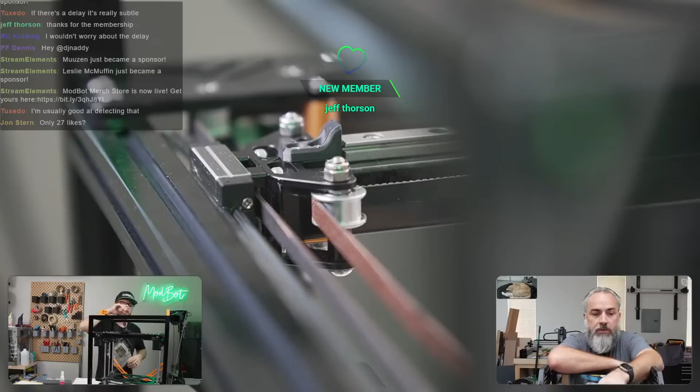When we took apart the X beam to grease the linear rails, there are these little CNC'd spacers that sit between the bearings of the linear rails and the CNC'd part that holds on to it. There's a spacer between the linear rail block and the CNC part that holds the carbon fiber beam. And what both Steve and I didn't realize, maybe because we were live or just an oversight, we both did the exact same thing.

I have a feeling it might have come from Mellow that way too. Yeah, it's possible that they ship this way, but these spacers are not square—they are rectangle, and we did not see that.

If anyone saw last week's stream, I told Steve one of my belts is sort of at an angle, and Steve said mine too. The reason is that it's not square, it's rectangle, and the way we had the spacer turned made it so the belt didn't have quite as much spacing in between here. These little blocks, since they're rectangular, you want the long ways to be horizontal and not vertical. If they're vertical, the extra length pushes into the belt.

So after last week's stream, we had to take apart the X, basically the CNC parts, and flip it, rotate it 90 degrees. That is really important to check because, again, it's not a mirrored piece—it's rectangular, so the orientation does matter.

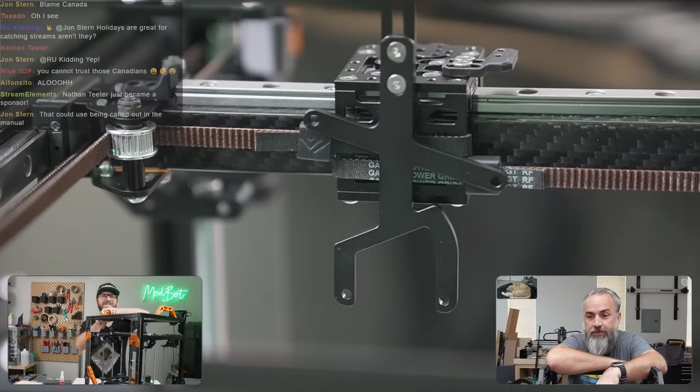So initially, going with what we saw on the 330, we had the belts going from outside to inside, and it was very subtle. But once it was brought to our attention, we saw that by doing that, the belt wasn't perfectly parallel to the back of the carbon rod. It was slightly kinked, which maybe would have been fine, but once Vez showed us the two methods of routing the belt, we ended up redoing it because we wanted to do it right.

So instead of that, the belts go basically underneath or behind the CNC'd part, the back plate, and then they tuck here. On this side I did the same thing where I ran it the whole way, but Steve let me know there's actually a pocket inside here where you don't have to run the belt the entire way. Luckily we had enough extra Gates belts from other projects to do this, because after last week's stream we did not have enough belts.

You didn't either, right Steve? You had to use other belts? I had to grab an extra belt, yep, because we hadn't trimmed it close enough—that's the length, yep.

So on last week's stream, I pinned a comment saying we did some things wrong in the belting, and I put a link to Vez's video on how to belt the 235, just to hopefully clear that up for anybody watching this later. So those are the two things that we've done from last week's stream.

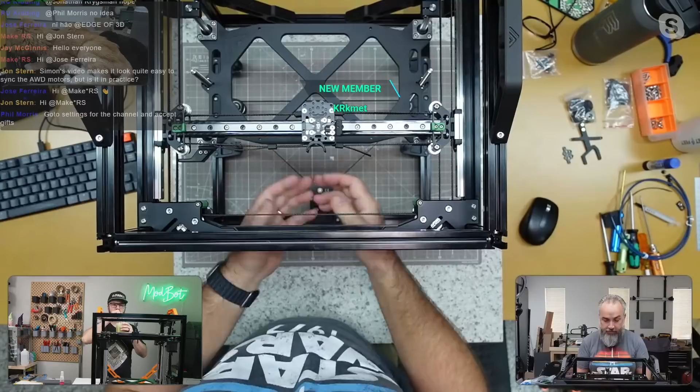Something that I just noticed, and with the way this is intended to be belted, maybe if I can take... yeah, there you go. So with the way this is intended to be belted, all the talk about having equal length belts gets thrown out the window, because the belt here on the left side of the tool head takes a shorter path than the one on the right.

So what I've done is I took a couple of the stoppers that come with the linear rails, and put them in a spot so that I can at least, when hand tensioning these, see if I've tweaked the gantry to any degree. And what I just noticed as you were talking is one of my pulleys up here on the front, the belt was riding on the edge of the pulley instead of in the center. So that's putting me basically a full tooth out of tension on one side. So while I'm thinking about it, I'm going to pull an extra tooth this way so that they're about the same.

We still want them all to be as close as possible when we go to do the final tensioning. And that way, when we use the front steppers to do that final tensioning, they'll end up at about the same spot. Your belt lengths will be exactly the same. That'll have a slight impact on input shaper results, and that kind of thing.

So if you do it sort of incorrect like me, and route the belt entirely across the cage on both sides, you can do the same. I'm looking right now and I cut them identical, and if I look at the amount of teeth sticking out from both sides, I count 1, 2, 3, 4, 5, 6.5, and 1, 2, 3, 4, 1, 2, 3. Yeah, I've got exact.

So let me go here to show the side. When we found out about this, and I realized that the belts that came with the kit I'd cut too short, I ran around the house like a crazy person trying to see if I had belts. I had non-Gates belts, I had clone Gates belts, and I had snippets of true Gates belts scattered everywhere. So I was able to find, this is the longest Gates belt I had in the house. I had two of them cut exactly this length - must have been from a future project.

So it ended up, I guess with this one, if I'd gone through the slot, I had a little bit more slack. But for this one it was like the printer god smiling down on me, because normally it's not that way. I was worried about how am I going to get Gates belts here, maybe Amazon or something like that. So Steve had offered, I think on Sunday, like if you need Gates belts, let me know, I can ship you some quick.

So yeah, but today we are going to be continuing, and I think the next thing is going to be just doing a little bit more stuff on the cage, if I'm not mistaken. Yeah, let me see here.

Real quick, I think a good number, if you just wanted a measurement of how much belt you needed for this - if you had 1.5 meters of belt, I measured you can get away with as low as like 1430. But if you said 1500 is the length of belt, you would have enough to loop things around and be just fine. I think in the video Vez had, he said like 150 centimeters, which would be exactly that, or I think he said 13 for the shorter one, maybe the one you can go through that loophole or whatever. So yeah, you can get a little shorter there.

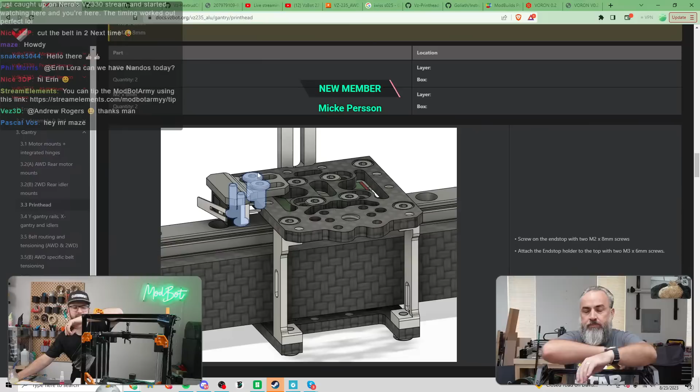So we did this last week. We did the cage last week, we did the end stop. I did verify too, Steve, because we didn't mount the end stop, we just mounted the CNC bracket, and I did verify it. It looks like there's plenty of space with the extruder mounted on top to still be able to remove that later, because we'll need to be able to access the end stop. I know you had said that because the adjustment screws are there it made sense, but I confirmed it when I was playing around with things.

Awesome, so running man is in place. Belts are installed, but we're not tensioning them yet. Okay, so this is where we are.

This we saw is slightly different than the blower fan shroud that comes in the kit. There must have been a revision. It looks like this is a unibody with the standoffs, which might not be the case, but definitely the overall shape of this piece is different.

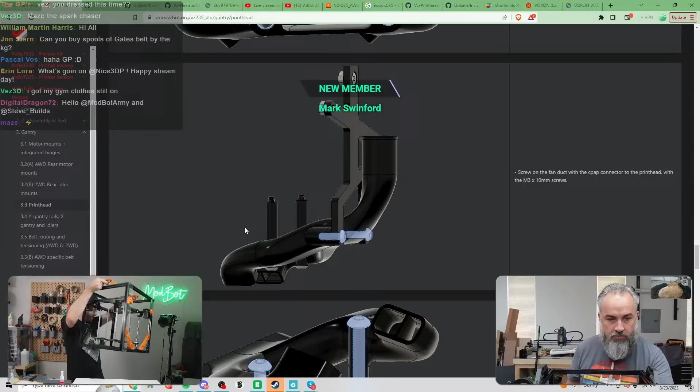So let me move this printer out of the way. Let me grab the actual shroud. I gotta find my printed parts too. Here they are, all right.

Okay, so this is the shroud that comes in this kit. Or, I'm sorry, this doesn't come in the kit, this came in our ASA VZ program, which I'm assuming is the latest revision.

Hey, what's up Luke? How's the high temp VZBot going, Maze?

Yeah, I'm looking for them. I'm certain I've seen them, I just have to figure out which bag they were in.

So this is the part that we're going to be using, and then we've seen two things. In the instructions here, they show - was it here or was it in the - yes, so here it shows to use heat inserts, and the kit doesn't come with any heat inserts. But we did see in another version, I think it was in the GitHub, that you can also use just M3 nuts on the other side, possibly.

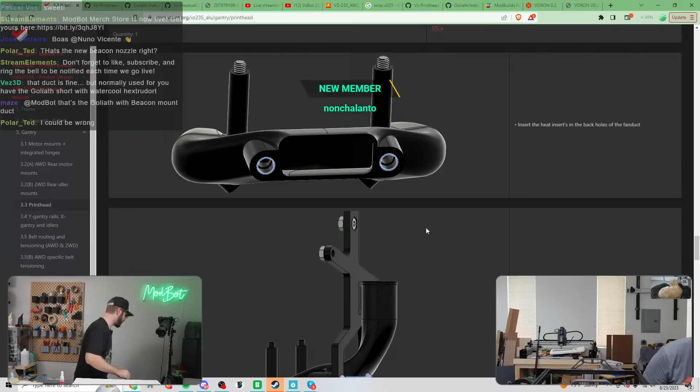I'm still going to use this because, again, if I'm going to be installing auto bed leveling at some point on this, I'm probably going to have to reprint a different duct anyway, I would imagine. But that is good to know. I mean, he says it's fine, but that is good to know, and that's probably why it looks different than the instructions. So I'm going to grab just a couple of heat inserts.

Let's see, it will still work fine. Okay, and I can't actually find my little spacers, so I'm going to install without them and catch up later. I think it's pretty easy. I'm pretty sure I saw them at some point, but I don't know where they are.

Oh, I've got another box here. So I'm going to use the Pinecil that chat recommended that I buy. Well, it was between this and I think it was a TS100 tiny little soldering iron. And this morning when I pulled out the soldering iron I've used for heat inserts for the last 5 or 6 years...

Oh, the spacers will be different, he's saying. The spacers will be different? Well, yeah, hopefully our providers at least printed the correct spacers. Oh yeah, I would imagine. Yeah, you're right, you're right, I would imagine that's the case. We'll try them, and I guess worst comes to worst.

What are you playing on Steam? I haven't played Steam in... wait, did it show Steam? Oh, it's open down below. I still have it on here, but I actually haven't, I was just telling Steve, I haven't played, other than on Steam Deck, like a video game on PC in a long time.

So because the soldering iron that I have finally died, I tested this out and it worked really well for some testing heat inserts I did earlier. So right now I'm just using, it's basically a MacBook charger.

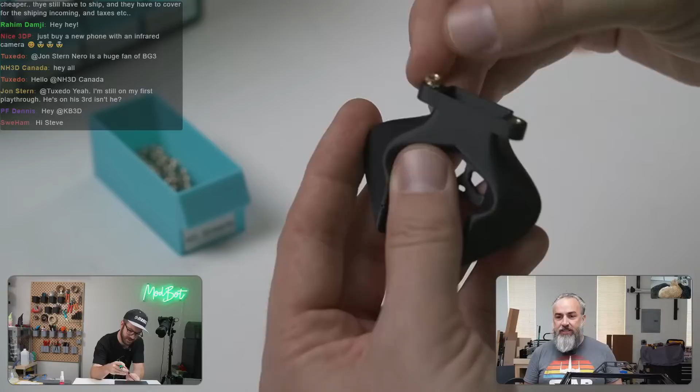So it's surprisingly inexpensive for that heat set thing. I think I looked at it, it's $25. Yeah, that's not bad.

This duct can be used for both air-cooled and short water-cooled Goliath, while the long one only fits the air-cooled or water block version. Okay, that's good to know.

So one of them went in perfectly. The other one, I've got a little bit of plastic. So I'm gonna take my little flush cutters and take this off here.

Steve builds this. Oh, that was PB. He read that.

So I'm just going to... I believe we will have them in stock soon.

I have mine, but it's amazing. That's Shammy talking about the heat set tool. Oh, CNC Kitchens? Yeah, oh sick. He's gonna stock them in the States? Looks like it. Oh, if that's the case, yeah, I'll order from you Shammy when you get them in. I'm not in a rush. I mean, the default tip's working, but I like to support Stefan, and it'd be cool to have. Yeah.

Cool, okay, heat inserts in. My iron's still heating up.

No, what kind of iron is it? It's the cheapest thing I could find on Amazon that had an adjustable temperature. One of my original ones was like either a Radio Shack or Home Depot one you just plugged into the wall. I think it was one temperature, and it had like a little orange LED in the handle or something like that, so you knew it was on.

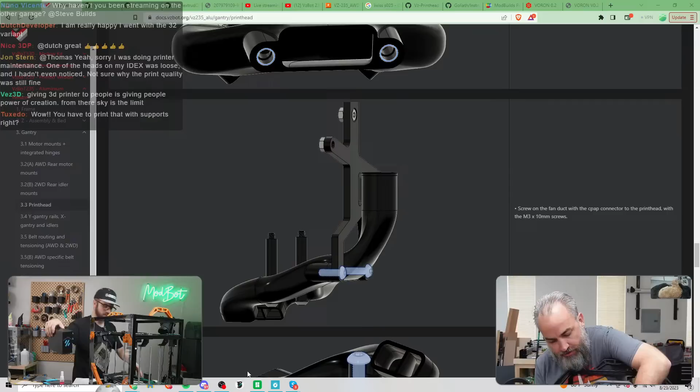Why haven't you been streaming in the other garage? Because I set up in here for the Voron Trident build streams, and I haven't moved back because it's a mess, and I like the extra space I have in here. But separating my normal work area and 3D printing tools into two different locations is the biggest problem. Plus, I can't just freely do something dirty in this garage now—I can't use the table saw without worrying about sawdust getting everywhere. Does that make sense? I think so.

All right, one second, Steve. Okay, so going from behind. Yeah. Oh, that's interesting. I screwed it in and completely missed the little duct. Oh shit.

This angle I'm at for the camera is incredibly awkward. Oh shoot. Just heard a crack. I need my driver—I'm trying to one-hand grab the driver while holding the screw in place. There we go.

Okay, so the holes on the CPAP printed piece don't thread into it well. Yeah, okay, just print quality issues? Oh, you think that's what it is? Wait, I think so, hold on.

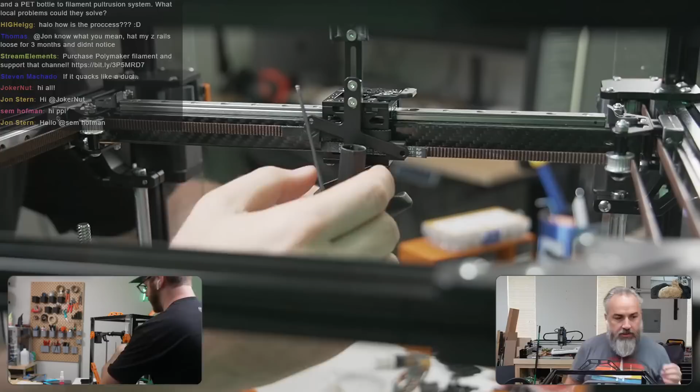And then as far as this must go downwards. Yep, duct needs to be going downwards, right? I can't see the picture from here. Yes, okay, the air ducts point at the nozzle. Yeah, downward, that makes sense. It's the only way that would make sense. Yeah.

That's pretty funny, I thought I triple checked that I had grabbed the right piece, but I grabbed the smaller one. Yeah, so I've got this—I'm not going to put the spacers in because I can't find them. Okay, but normally those would be some M3 by question mark screws. I'd say those are going to be M3 by 25s. Is the question mark because it's related to where you have the fan set at? Because you'd need longer screws if you had longer spacers, so they can't have an exact size.

Right? Yeah, because if that whole thing slides up and M3 by 25 isn't necessarily correct, that whole thing slides. So that spacer is going to need to be variable, right?

I'm gonna leave my spacers off for right now. I can't think of, or should I just? It's going to be hard to get in with the Goliath on. You're going to have to pull the Goliath off later. Okay, so I'm going to have to, and that's fine.

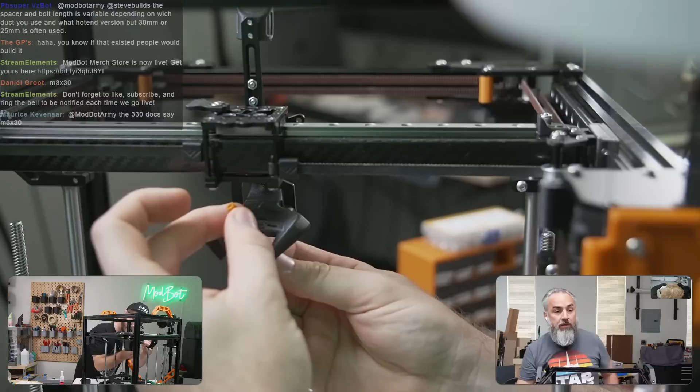Oh shit! I need, I gotta clear out these holes with a reamer. Do you have the reamer? Oh, you betcha, Steve. Awesome.

Pretty much every time you've been like 'hey, buy this thing,' I end up buying it, and it's pretty much always saved me. So let me see, this is 3. Yeah, the holes on the bottom here just aren't super clean. See if I can hold this in place.

You gonna come over here, Charlie? Hey Sam, college starting next week, for mechatronics engineering. Awesome. Is it first year? That's exciting.

I should have done this before I put this on. That was not a... are your holes, can you fit an M3 through yours, Steve? Let's find out. Okay, yeah, mine's requiring... I think it's because of the direction it's printed at. That's sort of where a lot of the sag ends up.

I have not used a Goliath before this build. Yeah, mine will need some reaming as well. Okay. Okie dokie, all right, bolt should hopefully go through now, and it does.

Standoff goes right here. What is there, a 25's too long, is there a ringing in the background? I don't hear anything. Really?

25 is cutting it close. I think for these guys, 20 mil is probably better. I can show, let me see if I focus it. So that's it sticking out. It's gonna be very close going through that if it's gonna be going into that carbon fiber rod.

You see that, Steve? Yeah, it's close. I think I'd rather go a little bit lighter. Hey, Adam, okay, yeah, let's see if I've got a 20. Does the kit have 20s? No, do I have 20s in this old Voron screw organizer?

M3 25s, M3. I don't have M3 20s. Oh man, I think I'm gonna hold out, Steve. Okay, yeah, we're both holding out on those then. I've got to run around and see where I've got an M3. Actually, damn it, let me check one last place.

I think I've got another set of leftover screws from when I did that Voron 0.2 build. You still hear ringing? I hear something.

I'm looking on my computer to see if I have any tabs open that are doing some noise. It's weird, yeah, I've got 16 and then it jumps to 25, so I'm either cutting or running around looking for something later on. Spacers should be around 23 millimeters.

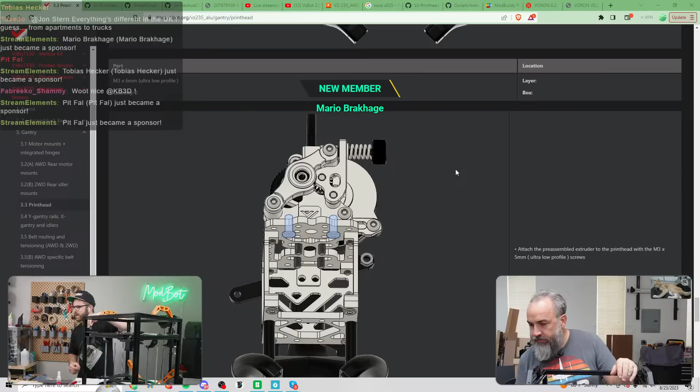Okay, so next thing I think we're mounting the extruder, Steve, is what it looks like. Awesome. And that looks like it's with 2 ultra low profile wafer M3x5s, which we do have.

So this is the, what do we call this? The keyboard extrude something. What do you mean, Hextrudort? Oh yeah, VZ Hextrudort. I have a hard time saying it, but every time Vez says it, or Simon says it, he says it like perfectly. I mean, I guess he probably named it, so, but yeah, it's a

gorgeous looking extruder. We showed it off, I think, when we did the first unboxing, but for anyone that hasn't seen it, it's just absolutely gorgeous. It's got the VZ logo, it's all black CNC'd, nicely anodized, and it's got the helix. So they're called helicoil, or what's? I don't even know. Helical, okay, helical gears on here. So yeah, these are really, really pretty.

Okay sweet, KB is going there, so I'll see you in October then. That's exciting.

Yeah, it's weird, in my AirPod I'm hearing an extra noise. But if it's not coming through, then I can ignore it. Yeah, I don't hear anything. I know yesterday you said at one point too there was something weird happening. Remember when we were talking, like you heard a strange sound? So I don't know, but your audio sounds really, really good to me.

Awesome, yeah. Okay, so for this, it looks like it just basically sits right on top and aligns with 3, 4. So there's no extra things here. No extra, okay, so we need.

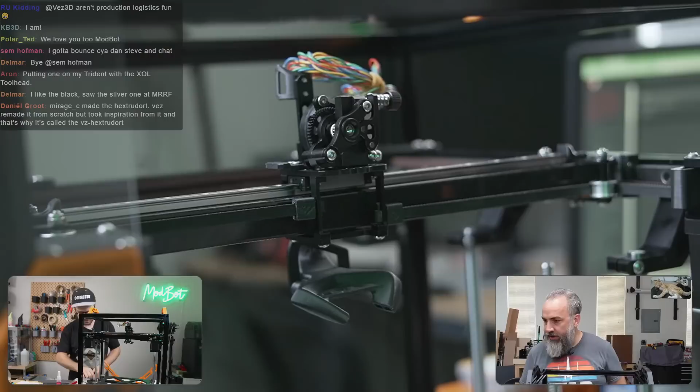Doesn't look like it, it says M3x5s. More M3x5s. Are these actually M3x5s, or will M3x6s work? Oh, it says M3x6 up top, so I hope that's... I would. Further down in the thing, it says from the bottom going up, M3x5s. I'm gonna install 6s and pray. So yeah.

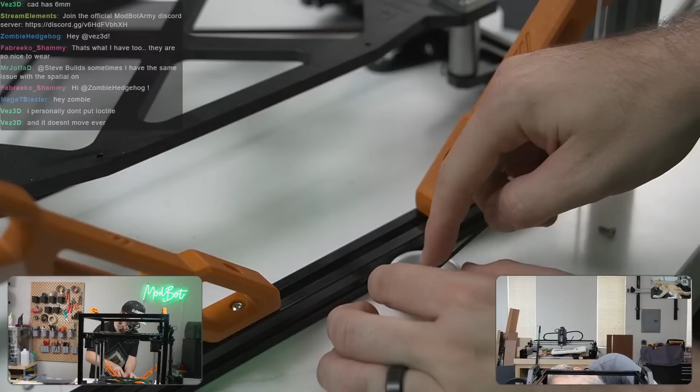All right, let's see if I can... I personally don't put Loctite, and it doesn't move ever. Well, that's...

That's wild to me. Even, Vez, on your primary one that you're pushing at those crazy speeds, you don't use Loctite at all? I feel like that's nuts. Because he also just says that he removes stuff so often. Yeah, that's fair, that's fair. If you're mad scientisting your printer nonstop, I could see how you might not want to lock things down any more than you have to, if that makes sense.

Yeah, these do kind of look like they lock or settle into a spot on this spacer. Okay, I'm trying to, let me see here.

I got one in, but for some reason the second one, it would help if I was going in the right hole. Got to go in the right hole, it's critical. There's a couple small ones on the other side that I was going for. No Loctite, yeah, I'm excited to try.

What do you put in the Goliath on, Zombie? On your Trident, or on something else? Is there not a stealth burner? Is there a mod, Steve, for a Goliath? I know there's nothing official. Nothing official, I'm sure someone's made a mod. Someone's made a mod for everything. That's true.

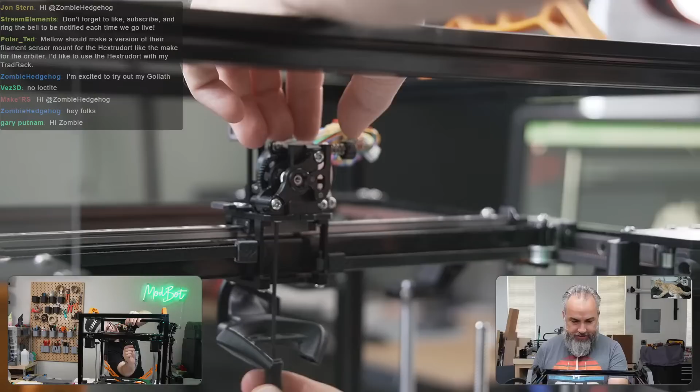I mean, I think there's an ultra super mega volcano mod that stretches the stealth burner ducts down 8 inches. This says, okay, I've measured the screw needed on the duct spacer. It's 28 millimeters with a 23.5 millimeter spacer. Okay.

Is 28 millimeters a standard size? It's not, huh? It'd be easier to do, Vez. Oh well, I guess it has to be, right? It has to be a certain height, there's no choice, at least. Right, because there is space, there is space if you wanted to put a spacer on the other side of that duct to use a 30 millimeter screw. You could put 2 millimeters of spacer on the other side and be fine, I think. Okay, yeah, I guess worst comes to worst, for a 30, I'll go out in the garage and grind it down if I have to. For a 28, but that's good to know.

Okay, so I think that the next thing is basically Goliath time. So for the Goliath stuff, I'm going to at least start off by moving the printer out of the way so I've got a bit of a cleaner work area.

Hey Vez, when you say we can print the other one, you're talking about the whole ducts? The full duct? The other duct? This duct was designed for the short version of Goliath. And there's a short version versus this long version? Oh, that makes sense. Yeah, for the water-cooled one would be shorter, Steve, because it doesn't have that same heatsink probably, it probably uses a different block setup. At least that's the only thing I could think of. Otherwise, I don't know how you can go shorter because you still need that heatsink, the one you see in the duct.

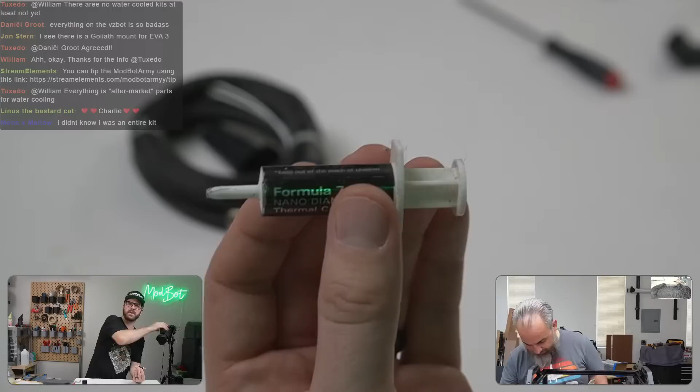So yeah, last night I was running around trying to figure out if I had any thermal paste, and I found some of this stuff. So this is what we're gonna use in place of the boron nitride, or at least what I'm gonna use. I don't know where I got this from, probably many years ago, but it's probably better than the boron nitride. So we're going to be using this Formula 7 stuff.

What are you using, Steve? I'm using Arctic MX2 because that's what I found too, in my stash of things. Just randomness.

Okay, let me go overhead and see if I can zoom in a bit. That's as far as you can zoom in. That's fine. So we'll start off by removing the 3 small bolts holding this in place.

Definitely not wanting to lose these little screws.

And I know I have some more current thermal compound in my collection of things, I just couldn't find it last night. And this stuff I'm using right now is actually a little more dried out than I would like. Maybe I can get a little further into it. Let me try a little. Okay, never mind, I got it. It's just the plug on the end was really dry - behind that, it's nice and gooey.

So I thought you couldn't use PC thermal paste for heat breaks. Why not? I know that Drop Effect also recommends using PC thermal paste. They did some testing, I can't find it anymore, but I looked for it - they tested 3 or 4 different thermal pastes and found very little difference in performance quality.

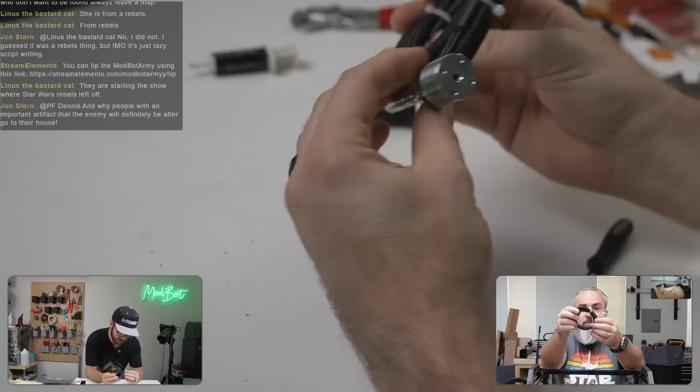I think it's reasonable to run some additional wires in there. It just means cutting off this heat shrink and replacing it, I think.

I'm curious, because it feels like the heating element wires have a coating on them, or maybe they don't. How hot, and where the heating element of these wires stops, is another question I have. Yeah, I guess that's the thing, you can't put wires near it or melt them.

Are you saying that if we put wires through there, there's a chance of overheating? It says you can't put wires near it or melt them, but you can remove that sleeve if you want. That's what I'm trying to interpret, maybe there's a typo. I have personally removed the sleeve, is what Vez is saying.

Well, let's explore that when we're prepping for wiring. Sounds great, explore our options. We have Vez here, can you call me on Discord somehow? We're on Skype, so I don't know how we'd do a Discord thing right now. Yeah, I have no idea how we'd integrate someone.

Vez, we're not going to be doing the wiring today anyway. I just wanted to run it by and see, since you were here, if you had a solution for it. So if there's any images that you or PF or anybody wants to post in our Discord that we can look at for inspiration, that would be cool. It's not a huge concern right now, I just wanted to ask.

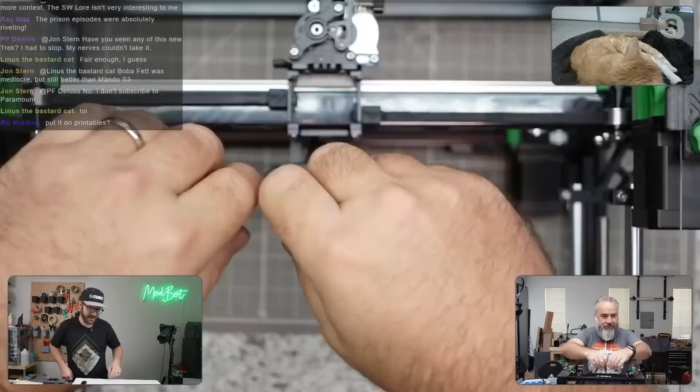When Steve showed that jig, I was like, that is way better than what I use, which is just holding the PTFE out in front of me and doing my best to freehand slice downwards. Anyone who knows me and my squirreliness can imagine how jittery my hands are trying to cut perfectly straight. So yeah, I like this solution a lot more than mine, Steve.

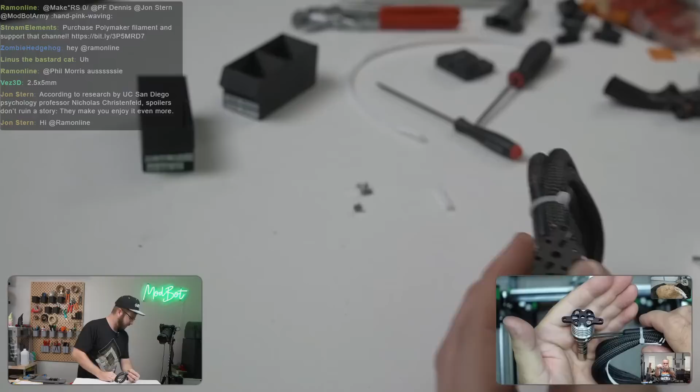There we are. Oh, you've got yours going perfectly out to the left. Yeah, that's different than mine. I've got it going slightly inwards. All right, I guess I'll just...

For now it doesn't matter, because I can always take off the 3 prongs on the bottom and rotate it if need be. Yeah, that's what I'll end up doing if needed. You might have to still rotate it up here, but we can always go through and redo this when we need.

This is not the right one. What size driver is needed for this? 1.5? Yes, oh wow, okay. It's in my special cubby of hardly-used tools.

It's interesting, as we saw before, the screws that mount the extruder to the carriage go right here. These screws are more recessed than the front screws, to give that clearance. I am struggling. Steve got it wrong?

What'd I get wrong? Slightly to the front? Oh, slightly more wires coming? Yeah, I do need to go more to the front. I was lining this up before and thought this would be correct, but Vez is absolutely right, I've got it wrong.

So don't go by me. Okay, so what I have is probably fine then, going slightly out. I feel there's all sorts of confidence spewing from... all right, why am I not? I do have it wrong. So let me see, I was eyeballing things and thought I was close, but he's right. I'm off.

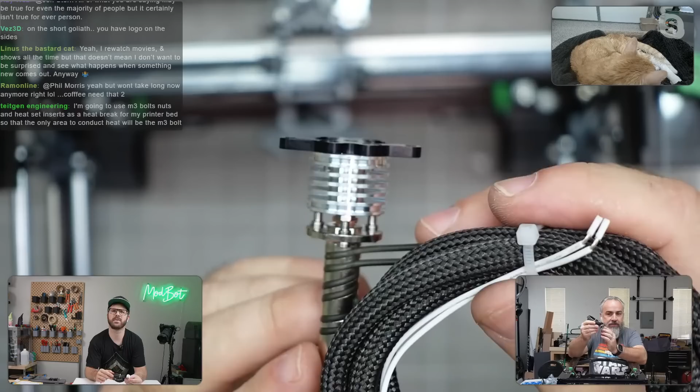Let me see yours. What do we got? What do you want to see? I just want to make sure I've got one pointed forward, but now the wires sort of go backwards instead. I'll show you, here. All right, let me go here. Okay, one pointing forward, yep. Heatsink on top, yep. Wires end up going this way. You see? Okay, so see how they go?

Right, then. And I'm waiting for Vez to say Steve is still wrong. Okay, I think I've got it.

I know exactly what you were referencing, Zombie. I know exactly what you were referencing. Is this my trident? Huh, is he referencing my trident?

He put the front Z stepper mounts with the logos going to the side, like mine, exactly what you're going to change, but that's okay. You said you were going to make a change to the trident that made it actually matter, so that forced you to have it correct. That's funny that Zombie did it too, though.

So Vez is saying check the CAD if we're in doubt. No, the CAD has it going up the left side. It has the wiring for the Goliath going up the left side, when everything I've heard is going up the right side. So that doesn't work. Which is correct?

I've got mine matching yours, Steve, with one pointing forward and the wires going out the right side. To be honest, Vez, I don't trust the CAD. There's so many little details like this that if we should be looking at the CAD for this, then we will, but...

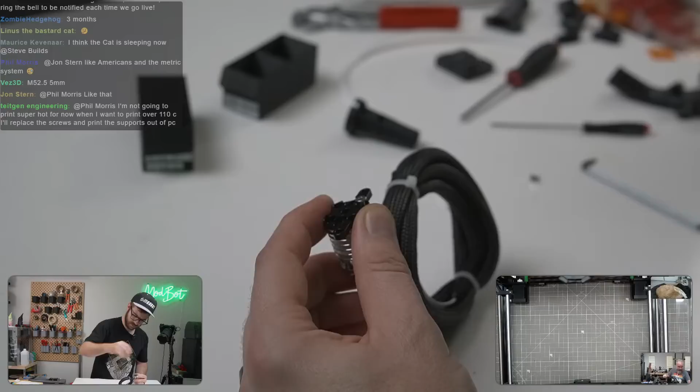So something to note, something to note for Mellow. So you're telling me I'm getting my grind on again? I think we might be, because we can't tighten them - we can't unless you just tighten them into the aluminum, but I don't think that's a great idea. The front ones tighten just fine.

The rear ones are bottoming out before they're tight. There's not as easy a way to hold onto these though, because we don't have 2.5 millimeter nuts. Yeah, I think I'm just going to throw them into my vice grips and take out a file. You don't have 5mm other than... I'm saying for sure, absolute for sure, we did not get 2.5 by 5.

Yeah, absolutely for sure. It came - they're not even labeled on the little baggies they came with. These are labeled and they're measuring M2.5 by 6. So if the other folks got earlier kits or something, they changed something.

I don't know if I want to. I don't have a good way - I mean, I could use my grinder, but I want a good way to recommend to you how to do this too without a grinder. This is what I'm planning on doing, Steve: gripping the top of the heads face up as much as I can with my left hand and just filing a millimeter off.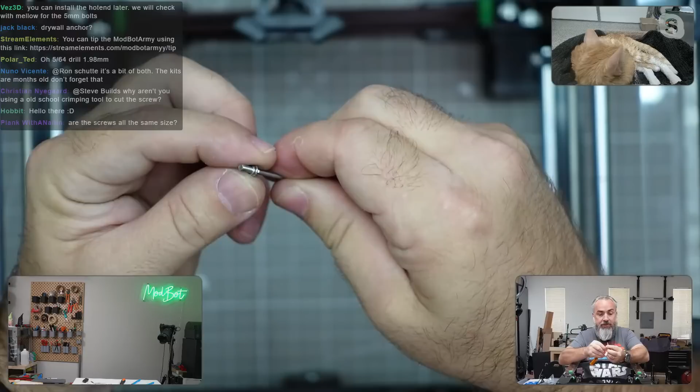Why aren't you using an old school crimping tool to cut the screw? Because I don't have anything for 2.5 millimeters for one. For those to work well, you need to be able to back those out through the threads to clean the threads up. And I don't have any M4 or M2.5 nuts to be able to thread onto here to clean up the threads either. So as it is, we're going to have fun with these threads.

These are the only 2.5 millimeter screws in the kit, and they are just a slight bit too long. I'm convinced it's all a bad idea. I was out there, I found it. I only found the cutting disc, but like you're saying right now, even if I take a sander to it, I'm concerned that I'm going to destroy the threads on these little screws.

So I'm thinking maybe we move on to panels. Yeah, well we can probably mock this up still, put it on with just the 2 screws. Okay. But the low profile head here is key too. So just finding these somewhere - we'll be able to find them on McMaster probably, but not anywhere that's going to be reasonable shipping and quick. Yeah.

Well, just having a Dremel or something like that is fine. But no matter what we do, we're going to goober up those threads on the end and have no way to really clean them up. 2.5 millimeter threads, or the threads on a 2.5 millimeter screw, are really fine, and it's going to be really tough to make sure we're not gouging or destroying the threads on the heatsink.

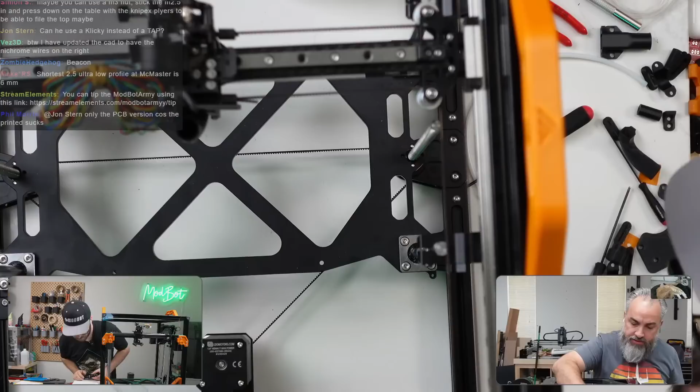Okay, let's see if I can get this in. I've only used 2.5s for hot ends and only the fasteners that came with them. I think I bought 2.5 by 12s one time because they were needed in an earlier version, I think Afterburner, that was different, or maybe it was the first V0 or something, it was different from what came with it. Thanks, Rod, I knew I just couldn't remember if it was Ron or Rod.

Misumi USA has them, so I've got a link in my Discord chat, it looks like, from PF Dennis. Oh really? Yeah, Vez is going with my original suggestion, to drill the heatsink. Really?

Honestly, why is it bad? If you used a pin vise where you could do it by hand so you're not goobering up the threads, I bet you could do it well enough.

I can ship you guys some. Okay, I'm gonna just slide my Goliath in place, man. I even have an M2 and M2.5 tap and die set. That's nice, I should get one.

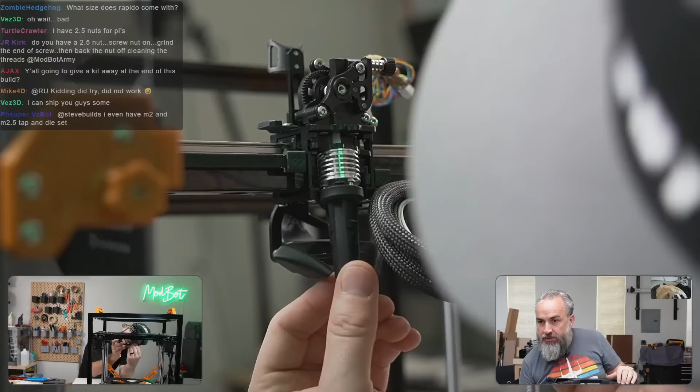Okay, are we on the same spot now? I think so. What screws are used for that? Yeah, I agree Vez, worried about screwing up the threads. I'd be confident doing it myself, and I'm sure Daniel would too, with the right tools. But in general, probably not recommending anybody else to do that.

Yeah, that's for the wires, that's why. And Jose, this is why I was saying you could probably do it with a pin vise pretty reliably, but I think a proper screw is probably the right solution.

Where are we at? So I slid the Goliath into place. What screws do we need for this? These are M3x6. Are those more of the... I'm just going to use the low profile ones. Yep.

You can cut the screw. This is the easy way.

It might be easier to source some M2.5 nuts, Daniel, because Simon Svez is suggesting to ship us some screws, but that's a lot of effort for a couple of screws. I'm pretty sure I've cut screws on stream using these bad boys, dude.

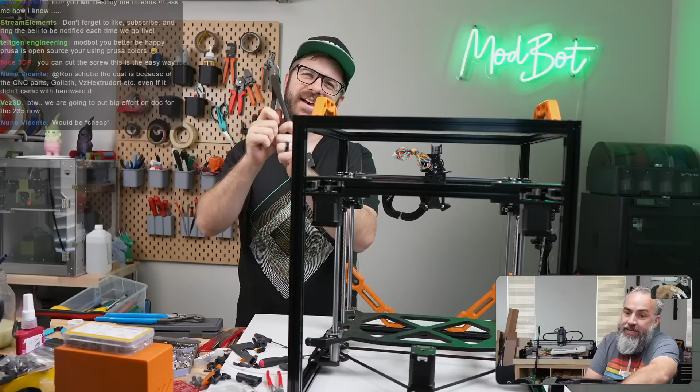But you're gonna screw up the threads. Yeah, but then I can hand file that baby down, dude, give it a nice little chamfer. I've done M3s. The issue is though, when the cut actually happens, one side of the bolt goes that way and the other goes that way, and these are small. So I'd almost want to cut this in a confined little area where there's only so many places they could fly. But I've absolutely cut M3s down to size with these bad boys before.

If we can get some 2.5 nuts, that's the best. Grind it down. Oh yeah. Yep.

Fortunately, Vez is here, PB is here. All of this is being relayed to Mellow. This shouldn't be the case going forward, for anybody that gets this kit. This shouldn't happen. And it's annoying. It's very annoying that it's happening.

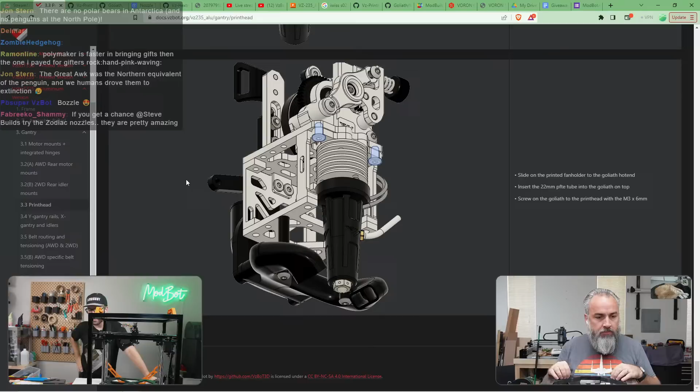I still might try, depending on what the sourcing situation on 2.5mm nuts looks like, printing out something like a block and see if I can use that. Because if I do that and have just that 1mm sticking out, I might be able to use these little snippers and not damage the threads, since it would only be that very end. So it's gonna damage the threads, man. You haven't seen how gently I snap the ball. All right Steve, I'll do whatever you end up doing. As long as it doesn't require a sanding wheel or grinding wheel or something like that, let me know what we end up doing.

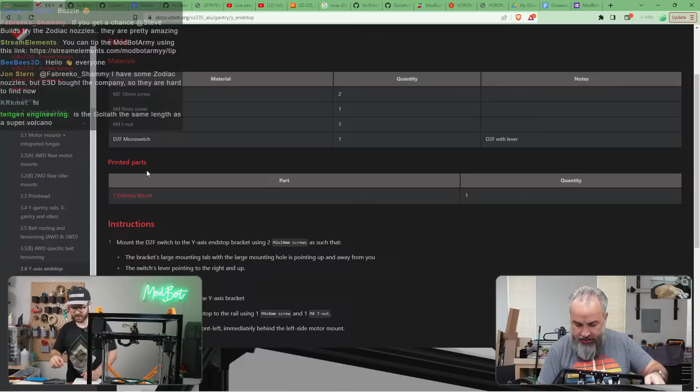Hi BeeBees. So do we want to... what's next? Do we want to do the panels? There's the Y endstop mount we can do real quick. Which just goes... it was T-nuts we established, right? Yeah. And we're not actually putting end stops in these because we're going to do that when it comes to wiring time, but this gets bits and pieces installed onto the printer.

Phil says there's plenty of options for... oh cool, plenty of options for M2.5x5 on Prime shipping. But I don't think they're the ultra wafer-thin flatheads, right? That's the biggest issue. If we just needed... really all we need is some nuts right now, and a way of cleaning up those threads after you grind it down or file it down. If Home Depot sells them, I don't know if they do, their metric section is usually pretty pitiful. Yeah, it's really bad usually.

So for this we want two... no, it says M4 by 8mm screw, one of them, but I think we need two of them. I'm getting a... so the CAD doesn't have the same Y end stop piece as we have. Okay, I don't know. I'm gonna go based off of the image in here. Wait a minute. How? Yeah, no.

Based off the way this looks, it looks like you could only fit one bolt in here. Are you looking at the CAD? No, I'm looking at the schematic here. So wait, am I looking at the wrong CAD? Is that in the documentation, the guide?

Yeah, it doesn't match what we have. Let's show Vez what we have. Here, I'll let you see. This is the piece that we have.

There's holes, but there's actually no way for us to get the end stop like that with this piece, like the way it's pictured in their documentation. Yeah, it's not possible.

Phil says there were a few wafers that weren't the cheapest. Okay, I think we're gonna try with the nuts first, Phil, and if that doesn't work out, we'll figure out the backup plan. But that's good to know.

I'm not 100% sure where this mounts, that's the problem. Yeah, I'm not either. Okay, I'm thinking panels. It doesn't really match, and if we look here, let me show the CAD. Let's hide this, get a little better view. This piece here doesn't match. It bolts to the underside of the extrusion in front of this front left stepper.

Wait, the CAD drawing though is closer to what would work than what's pictured in the actual. Yeah, because at least with that one you can get it, if we look at this from this angle. Wait, no, I'm lying, I don't think so. I'm trying to figure it out.

So if that, I think that mounts there. Will it actually trigger? Yeah, maybe. I think maybe we mount it like this. Here, let me see if I can get an upper view.

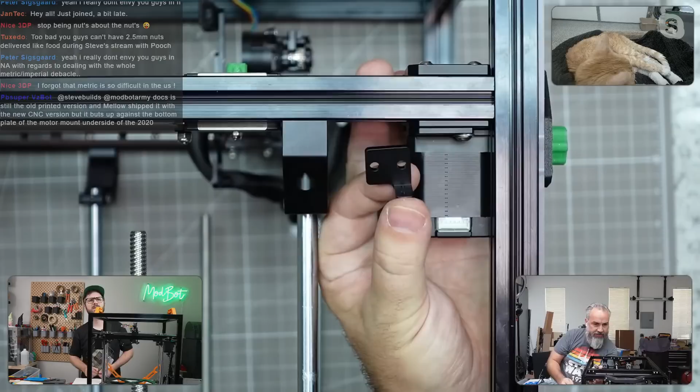Only one of the holes has a T-nut, huh? Well, there's two here, but if you see how I have it here, if this comes in, can you get a view on my part?

Yeah, okay, so if we put it in under here like this, now you might be able to see. Yeah, so that's the front left stepper, right? Yeah, front left, and you've got it like this.

Okay, yeah, I do see docs is still the old printed version, and Mellow shipped it with the new CNC version, but it butts up against the bottom plate of the motor mount, underside of the 2020. I think how I'm showing it here is right, PB. Am I catching it correctly?

So okay, I am going to use... I'm just going to leave it. You've got a good view for this piece, I'm going to leave it on you for right now, Steve. I'm just going to use a couple, putting both screws in here. Yeah, I am too, 4x10s.

No, I did 8s, M4x8s. Yeah, and the 4x10s bottom out. And Vez is confirming it's correct. Awesome, cool, okay, M4x8 is correct.

And I'm just going to use hammerheads here because they're so close together too. Yep, that's what I'm doing. Awesome.

Okay, so now we can do panels. Actually, maybe not, because did we want to play around with tensioning? No, we don't have to tension the belt prior to doing panels for the bed. Yeah, it's accessible, okay cool.

Bottom and rear panel time. We get to put feet on it. That's so exciting.

Here, you can take it back. About that, what? You can take focus back. Oh, I was like, I can take what back? Oh damn it, I did the wrong thing.

There we go, okay, so we are moving on to bottom and rear panels. It looks like they start with the back panel and then do the bottom, so I'm gonna do the same thing. You cannot tilt it on its face though because of the things protruding from the front. I mean, you can tilt it on its face, it's just gonna sit on those knobs. I don't want it to sit on the knobs. That's a good point, I agree.

All right, let's see. Bottom and rear panels. Are we gonna start with the bottom? I'm starting with rear based off the instructions. That's how it looks like they have it set up.

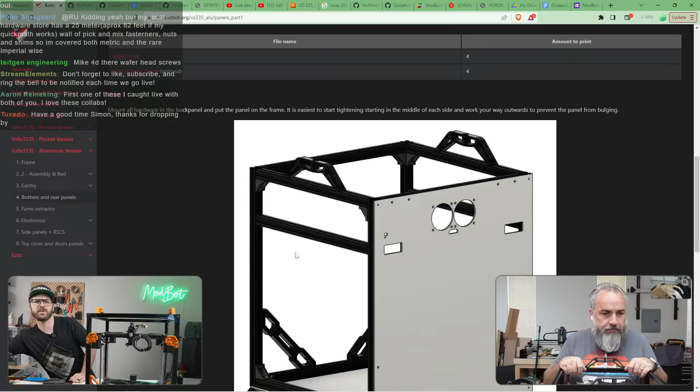Awesome, thank you. Okay, side, alrighty, so I'm gonna peel off the cover. What do we got? We're doing the back panel first? Back panel first, back panel first. It's got the nice logo.

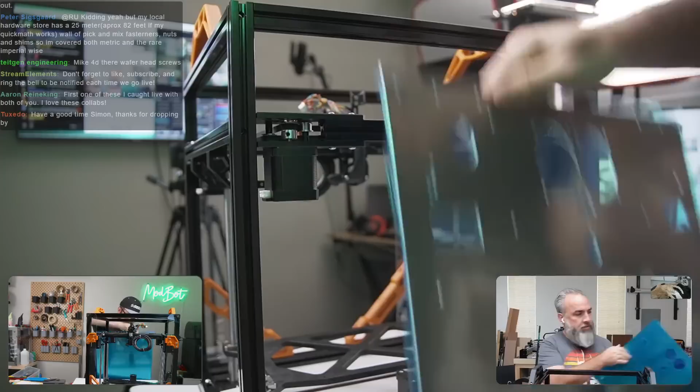Uh-oh. Some of my blue plastic kind of melted too. There we go. Did you drop it? Oh no, I didn't, because thank god the plastic was stuck on. But the way it was falling and I'm barefoot, that could have hurt, dude. That could have really hurt. If you want to see ModBot dances on stream, that's how you see it. My heart's like, it was definitely a heavier pitter patter than I'm used to on stream.

God. Be careful, Steve, well you're in the garage, you're probably, are you barefoot, or you got like, what do you? Oh no, I got shoes on, but they're not, okay, they're not like steel toed or anything. Yeah, that was terrifying.

Okay, what way, let's pull all this off. Are you giving people a good peel view? A what? A good peel view. Oh, peel view, I think so. Maybe, I mean it's important. It's an aggressive, this is definitely not like ASMR peeling going on here. It's very much so like just trying to not hurt my toes after that. Just get it done. Yeah, exactly.

This is a nice little laser engraved logo, though. Yeah, it looks super cool. And then it looks, from what I'm seeing, oh no, one of the corners on mine's jacked up. Oh no, and I didn't do this. Dropped? Yeah, like I'll show it. Yeah, mine got dropped on a corner too, but not bad. See mine.

It's hard to see, my view isn't great for stuff you're showing. Oh, all right, okay, not a big deal, it's on the back anyway. But this looks like it's perfectly mirrored, so I see every hole left and right. Looks great, motors are accessible. So I don't think there's a logo towards the front. Yeah, logo, I guess the inside. Yeah, I guess that makes sense.

Yes, all panels, almost cursed bot. You're like, what material is that, orange? This is Polymaker, we said ABS, right? Steve, not ASA, I was saying it wrong. It's the Galaxy ABS orange, not ASA orange. Yes, yours is ABS orange. Mine's ASA green. Yep, it's a gorgeous, it is a really, really nice filament.

Let's see if I can show it. I think when these came in we looked at them on stream, but it's got a nice little sparkle to it, it's real pretty. Steve's using the same series, the Galaxy series, but green and the ASA variant of it.

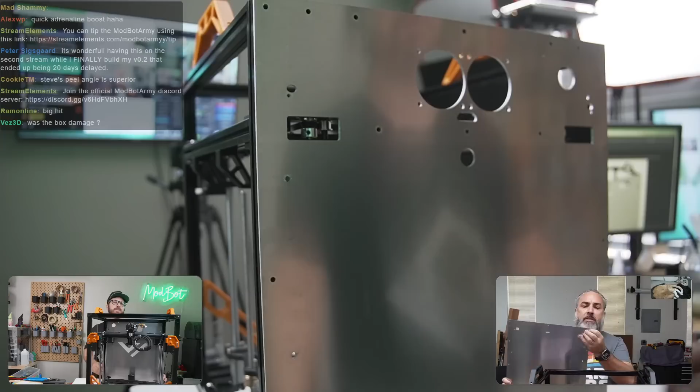I don't think it was a Mellow thing really. I think that both Steve and my package got held up in customs for quite a bit before it left either China or Japan. I don't remember if it was China or Japan, but I think customs looked in it and didn't put it back together well. Because when mine showed up, one or two of those black corners were completely off of it and it looked taped up again. So I think these were inspected. I could be wrong, but I think that's what happened.

Here, if you can give me a focus, I just want to show the very minor damage. This is what I saw, it looks like this side, you can see it looks like this dropped somewhere. It's very minor, it's not even going to be noticed, but just looking at details. I got more of a chunk than you then. This is a little flared here because it looks like it was dropped on the corner. Where is this, hold on, damn it, camera. Yeah, here's mine, let's see if I get this to focus. Oh yeah, my corner's a pretty good chunk, dude.

Shipping is so hard. Yeah, I mean, again, it's the back panel. No one will ever see it, other than that I just showed it on stream. No one would ever normally see it, and I won't pay attention to it.

I'm gonna use roll-in ball spring T-nuts on all these. Probably the better option. It's all M4, it looks like, right? Depending on the number of screws used to screw your panels, optionally trim pieces are meant to use M3 hardware. So where does it outline where needs to be M3 and where needs to be M4?

But I don't think we use trim pieces on the back. Why would there be trim pieces on the back? That seems like an acrylic thing to make it look pretty on the sides. What about the power inlet pieces? Are those all M4s? It looks like it.

All these holes to me look like M4. All of them on this back panel look too big for M3.

So yeah, I'm just gonna slide. I'll do the same as you then, since we haven't used them for anything, and this is something we absolutely want secure to save the toes. So for the back, the bottom holes, make sure that you put the T-nut in such that the offset will reach. If it's offset the wrong way, it won't fit, is what I'm thinking.

Hold on, I'm trying to think of a good way to do this. The camera angle I have for this kind of sucks. Maybe just zoom out a bit. It's already as far zoomed out as it goes. There we go, hopefully this will work.

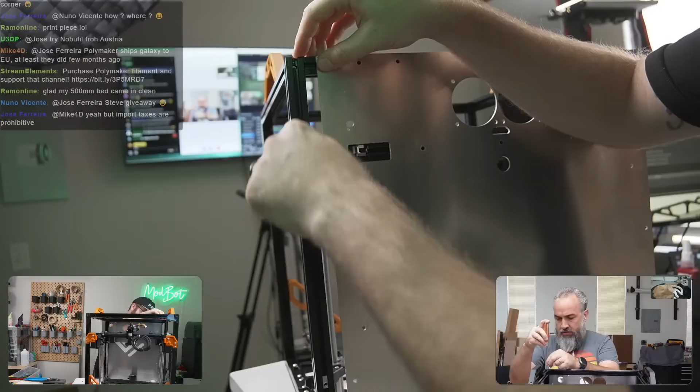I like that there's so many spots, because this is a pretty heavy panel piece. It is.

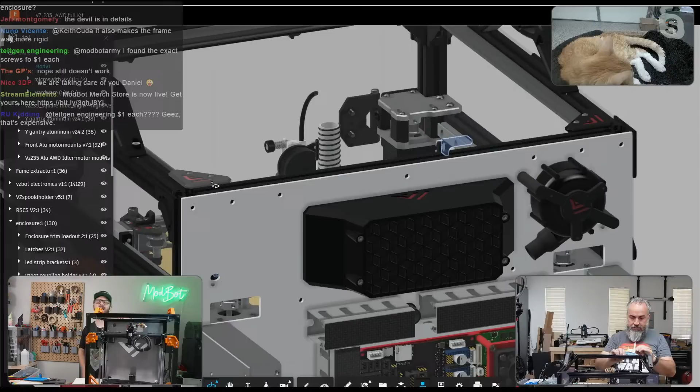What size bolt or screw are we using for all of these? M4, PB confirmed everything's M4. No, I meant length, like to get from panel into the... it's gonna have to be by 8s. Hopefully we have enough of them. This is a lot, dude. It is, but it's gonna have to be by 8s unless there's something sandwiched in between. Did I add an extra screw? Or an extra T-nut? Yeah, I'm gonna remove one.

I'll give you focus back. Okay, there's not a whole lot going on over here. Yeah, but all I have is CAD up. All right, there we go.

If that's the case, I'm just gonna thread the screws and T-nuts onto the panel, align it all, and pop it in place right now. I would rather do that than the spring.

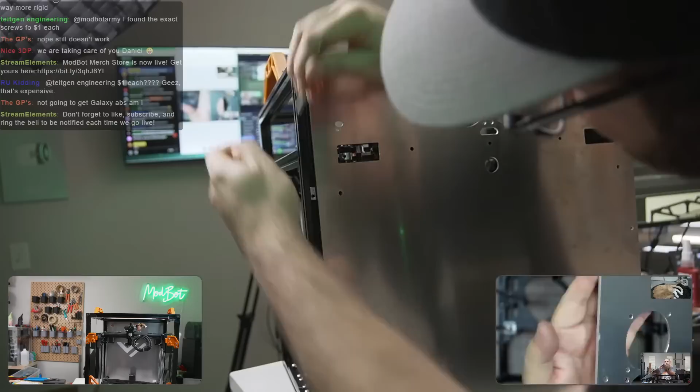Oh, I found my bigger... something happened. What do you mean? It's another thing. It's never going to be seen, but there's a pretty good scar. Not a scratch, more of a dent. A chunk. Yeah, but I'm going to take my file and get rid of that right now. Here, you can have it back. Have what back? Oh, you still have it.

I was looking at the wrong screen. Oh, I never gave you the power.

PB says any M3 can be an M4 if you try hard enough. Perfect. I guess we could use M3 by 8 T-nuts for the top and bottom and use M4 for the sides, but I don't think...

Well, I have 20 M4 by 8s that came with my little kit from Amazon. Do we not have enough normally? We've got 1, 2, 3, 4, 5, 6. It's cutting it close, and this isn't even including the bottom panel. And we're going to need M4 by 8s for the bottom? I don't know, this is me assuming, but I could be wrong. That's a good assumption, I think.

Yeah. Well, I know I don't have many, but we'll do what we can. Pops, so I'm going just hammerheads. Panels. Okay, hammerheads, baby.

I went with the ball spring T-nuts. I don't know, again, if only I could teleport you over here, I'd love to see if you're like, oh yeah, your paint or your extrusions are tougher than mine, or you can be like, no. Some of them have been tougher than others, and I'm pretty sure these aren't anodized. I found a chip in one of mine that doesn't really seem like an anodized chip, I could be wrong. It seemed like some other kind of coating.

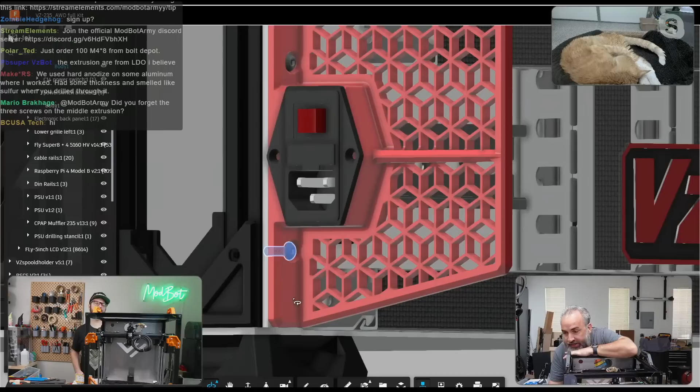Oh shit. But there's an additional screw on the bottom that isn't going to - let's see, if we, no, that's not what I wanted. We take this and hide it - this screw doesn't get populated on the bottom.

Do you see that? Sorry, I was looking at Mario - just saw that I didn't put any, I didn't realize there was the middle extrusion. I completely ignored it, and so my panel is on, yet I have no T-nuts in the middle extrusion that need 3 T-nuts. Oh, neither is mine, I did the same thing. Okay, perfect - that's why I said, oh shit.

So you're saying the bottom one just doesn't get a bolt at all? There's no spot for it. Here, first of all, these are M4x12, so remember that - we're going to need those 4x12s for that. If we show all objects, see the printed part is in the way of that bottom screw, so that bottom one can go away too. Okay, so on both sides, remove the bottom ones.

Okay, I'm going to really quickly redo this - I've got to pull all this apart anyway. You can have focus back. Yeah, I'm sad about that. The bottom one's going away, so we need to pull that and the T-nuts. I'm not too sad because now I have screws that can be used for the bottom. Yeah, that's fair.

All right, so I'm going to pull this panel off. The next two are going to be M3x12 or M4x12s, so those get recovered. I'm going to leave them as what they are for now, though. I've got a few extra since I bought extra, but once I pull this back panel off, we're going to do the giveaway. I'm not going to correct it and reinstall it, so...

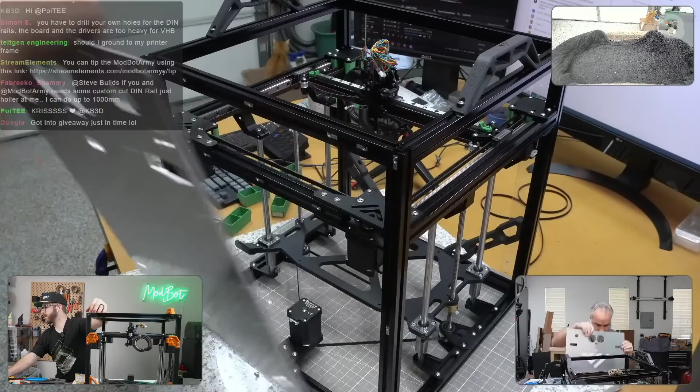I'm gonna need lots of IPA and cloths to clean all the fingerprints off that panel. For a sec, when you first started your sentence, I'm gonna need lots of IPA, I pictured you like, because of the things we have to do, like just having a few beers after. Lots of beers. Yeah, I'm gonna need quite a few drinks.

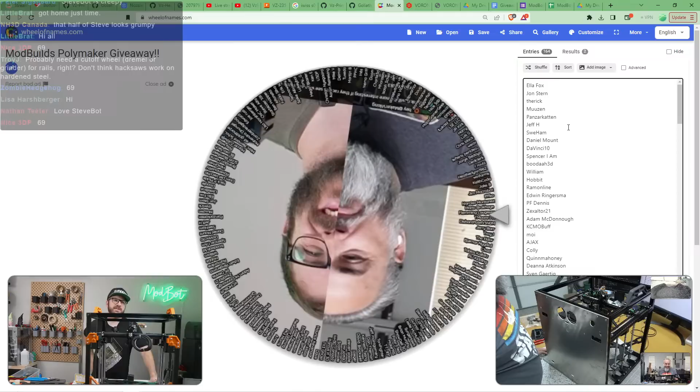Let me know in chat how many times we got to shuffle. That half of me looks like I'm concentrating, trying to line up our faces better. I'm just happy to be here. All right, we got 62, no, 69, 42, 42, 69. All right, 69 and 42. Those are tied.

Here we go, counting it out. I would not doubt if someone said I'll bet you money you misclicked - we're probably somewhere in a range of 5 away from 69. But here we go, good luck everybody.

3, 2, and the Steve and Dan wheel go. Here we go. Oh geez, who is getting it?

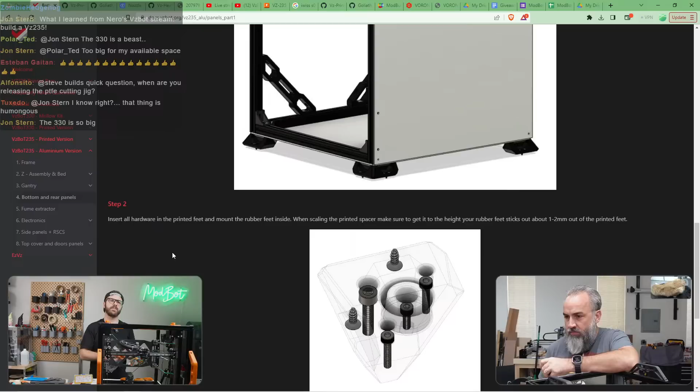Okay, so looking at the instructions here, it's definitely because the feet are too small, Steve. If you put the rubber feet inside of that hole, the foot doesn't even stick out. Oh, so okay, if you put the spacer in...

Where did I put my feet? What box were they in? They were in the box with all of the, yeah, I don't know, Steve. All my stuff's moved around, so it wasn't technically in a box right now at all. It's okay, I can find it.

Yeah, so the feet are pretty low profile. If you look at them from the side, it only sticks out ever so slightly, and that's with the printed spacer included. If you don't put the spacer in, then the feet aren't doing anything. I'm just not used to it. It's cool, it's pretty cool looking. They're very low profile, they just stick out enough to give you some grip.

So let's see, what do these thread into then? Oh, I don't know where I put my feet. My foots. Oh, they're there. They are pretty low profile.

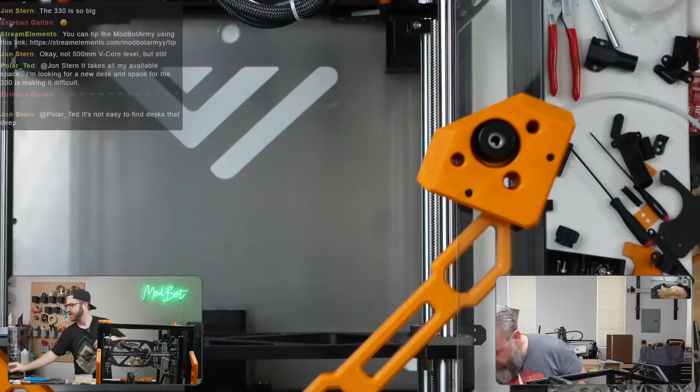So we need for the feet, what do we got? It doesn't show what the hardware is for the feet anywhere, does it? Oh yeah, they definitely need spacers. So what I'm curious about, you're on a live view there.

Let's look at the, let me, here, if you want to give me, I got the CAD up. Oh, I guess it showed in your view too. The view that you have is fine, okay. The question I have is those, no, what the shared screen?

What are those self tappers that are there for? Those coarse threaded screws, what are those for? Something tells me it might be a different foot that maybe had like an accent part or something like that. I don't know, it's just a guess.

Also, the feet have two smaller holes and a bigger hole. The bigger one goes into the extrusion. Oh, and the other goes straight into the end of the extrusion? Yeah. Is the end of the extrusion tapped? Yeah, is it? I'm looking at it right now. It is, okay, yeah, awesome.

I just don't see listed the hardware needed for this. Or M4, okay, so it looks like M4 by 25 is what's going into the side of the extrusions. M4 25s, where are we? Do we have that? M4 20s. I don't think the kit came with M4 25s.

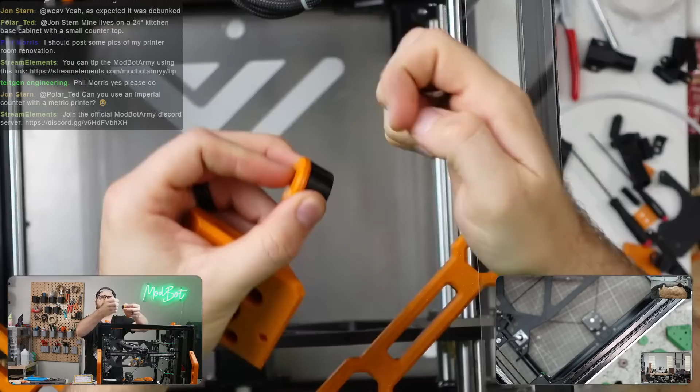Just so you know, they just go right through? Yeah, with no effort at all. Can you see my camera? No, I'm off, looking for a drill bit. Yeah, they just go right through.

Okay, I found a drill. I'm gonna drill these. I wonder, I'd have to look at the part, want to look at the part, see what the hole is modeled at. Either that or these are highly over extruded, or the clearance in the model might not be enough.

Yours are carbon fiber feet or no? No, this is the green ASA parts. Oh okay, so it's just standard. I'm just drilling my own clearance holes. Do I have an actual drill around here instead of doing this by hand?

Yeah. Okay, now I can do it. Ah, I'm in the wrong... there we are. I'll give you... no, you want camera? I don't want camera, alright. I'm just tightening feet, just drilling out parts.

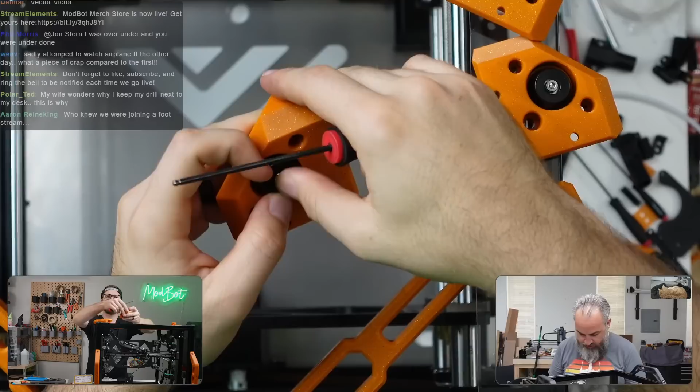Okay, now what did we say? These are supposed to be M4x20s. Who knew we were joining a foot stream? Wait, am I feeding camera? No. Okay, M4, did M4x20s work for you? Yeah, perfect. Why? The M4x20 won't go through on mine. You're saying it doesn't have enough distance? Yeah, it stops, this is fully inserted, and it doesn't reach the nut pocket.

Huh, that was way over my head. Someone said, who knew this was a foot stream? I'm literally building feet, and I asked about my feet. Yeah, that was well over my head.

Yeah, I'll take one apart for you, Steve. Let me see what the... M4x20 doesn't work for me. What do we have here? They're socket heads, right, what you're using? Yeah, I mean, it doesn't make sense to me.

Where'd my calipers go? I can go look for some 25s. 25s would work. Well, it doesn't make sense why mine would work and yours doesn't, something's got to be off. What the hell happened to the calipers? I used them earlier for something. I don't see them. I dropped them on the floor earlier.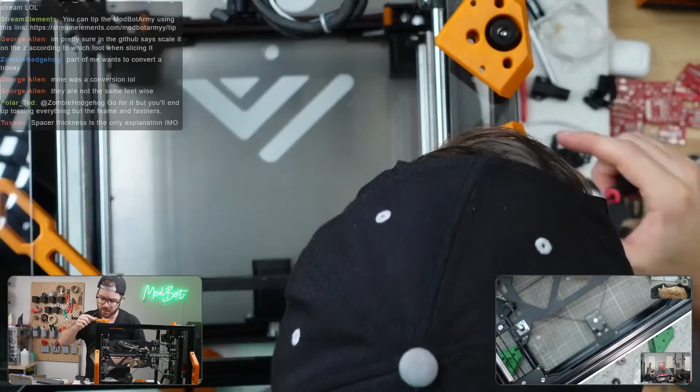Oh, is that? Let's see. This one has a metal insert. This one has a metal insert. This one doesn't have a metal insert. One of them does not have a metal insert. Unless it's hidden underneath the rubber. But the way this one's deforming and still spinning, I don't think it has that insert.

So I'm just not gonna tighten this last one down as well. And worst comes to worst, even if these nut pockets are hidden, I should be able to just order some - I mean, these are fairly standard feet, I can just order some and install them if need be. But yeah, the rest of them don't spin because that little metal piece is helping them stay in place, but on the rubber one, it just spins indefinitely, which is a bit of a bummer. Yeah, that's as far as I'm doing it. Okay, I think it'll be all right.

I'm just going to use hammerheads for these feet. We've got the one big bolt that's going into the extrusion channel itself. So, these M4x25s aren't going to work.

Shammy's absolutely right, I think I'm getting a stack up of frustrations right now. We've had wrong screws for the hot end, we've had even down to weird things with the feet. This isn't going to work.

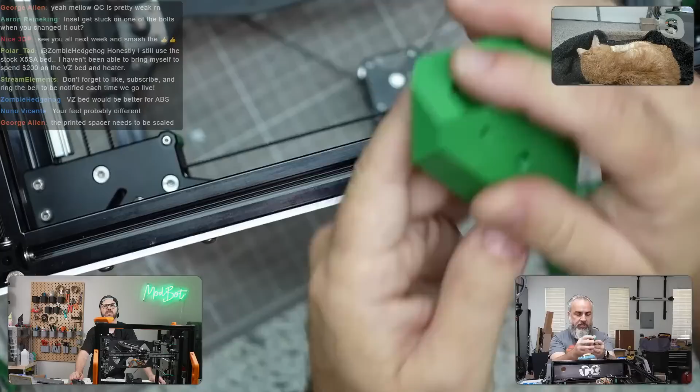What do you want to do then, Steve? Do you want to call it, or the only thing I would be doing is moving forward and installing the feet with the bottom panel. Well, if you can't do it - I mean the feet themselves are under flush. So now I've got to calculate the exact length of spacer I need, but even so I guess I need to go with a thicker spacer, maybe.

Because that's not a lot sticking down. Mine doesn't have more than that. Mine arguably has less than that. Look at it again, you can't probably. Well, see, yours has less than that, is why you have different spacers.

The coordination of what comes in the kit versus what parts to print is something that needs to be worked on. And I know it is being worked on, and that's a good thing, but I'm still a little frustrated today. I mean, I pictured any issues today were self-inflicted, not part of the kit.

Jose says you can shim inside the feet. Yeah, let's do that. Keep it rolling, okay, let me see how I'm gonna do that. I'm gonna grab that and that. I'm gonna use these M3x25s, and I'm gonna try putting just a nut on this side as a spacer. This is a temporary solution - a very temporary solution, but it'll do.

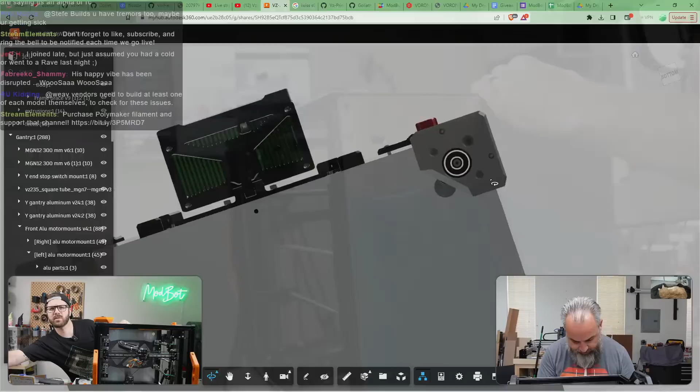Okay, I've got a solution for my feet, I can get past this. Is it some form of shimming or what? Yeah, yeah, and I had to, in order to get the...

Nuts into the printed part, because there is definitely some over extrusion or something going on here. Yeah, your parts definitely have over extrusion compared to the parts I got in. You showed it a couple times, like your belt ties or whatever were really tight when mine were fine as well. Yeah, like the belt locks.

Okay, so I'm just gonna load. Maybe I will try the spring nuts on the bottom then, Steve, since I don't care really that much if... wait, what am I doing wrong? I don't care that much if I scratch the bottom, I'm willing to risk it on the bottom. If I scratch up the inside of the extrusion, yeah, so let's do that actually.

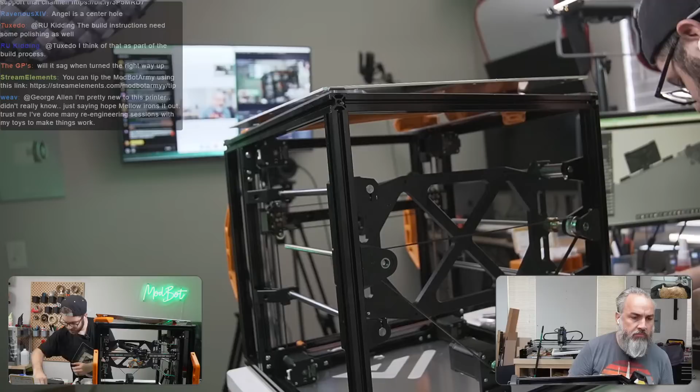Let's not preload these. Let's place this right here on top, and let's see if we can get... we'll need 1, 2, 3, 4, 5, 6, 7, and 8. Direction doesn't matter, so we'll do like this. There we go.

Will it sag when you turn it the right way up? You're saying the bottom panel if not supported in the center? It's possible, but I kind of don't think so, it's a 3mm panel, 3mm aluminum, the gap's not that big. I'm sure it'll be fine. I mean, worst case scenario, we could always sneak some screws in later, but I think it'll probably be fine as well.

Oh Steve, I'm doing it. What's that? I'm doing it, you'd be so proud, I'm getting these in. Nice, it's not even... I don't know if it's just these bottom ones are being nicer to me or what the deal is, or maybe it's like this specific driver I happen to grab. I think it's a 3mm driver. It seems like it's going perfectly in the screw hole, and this is easier than it was before.

We did also see though that on the Mercury 1 build there was a similar thing where some of the channels were T slot versus B slot, and one of them was like impossible. I was sitting over there struggling, and then I realized this one's got curved, like it complements turning the little nut in the pocket, while the other one is putting up a complete fight.

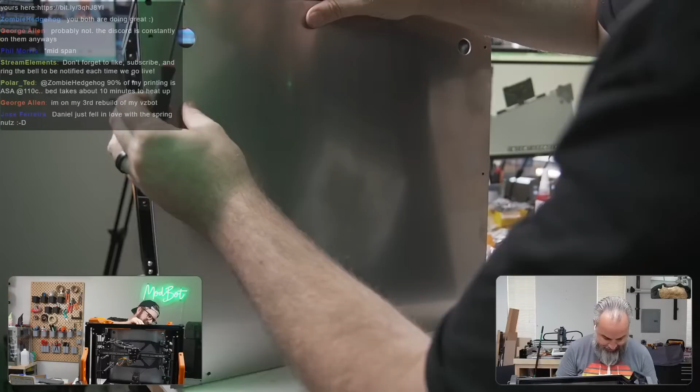Okay, spacers and feet, where'd the rest of the feet go? We are going to get this panel on one way or another. So help me, Steve. All right.

Daniel just fell in love with the spring nuts, and it was in that moment Daniel knew he loved the spring nuts. Conquering your aversion, that's what it's all about. Baby steps, you know, one small step for Dan kind.

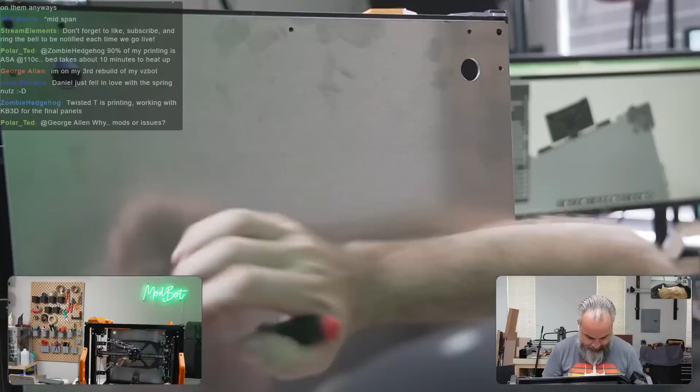All right, that one looks good. Let's align these good. Looks good.

So what it basically means is I need to print spacers for these feet that are 3mm thicker. I need 8mm spacers for these feet in order for things to line up properly. And you've only got 5mm that came with it, you're saying? Yeah, yep.

Those are looking pretty. I got an orange V0 frame from LDO to match. To match which? I only have one. Orange V0 frame. Oh, sick. Is that your next build you're doing? Twisted T is printing, working with KB3D for the final panels. Awesome.

Sick, okay, all right, I'm installing the big boys in the corner. Feet are on those, so now I can turn this on its side, right? Yep. Shoot, let's just go to one of the sides.

Then we need T-nuts in each corner. T-nut, yeah, so 2 per corner. It's gonna look so much better on its feet. Yeah, I agree, it's gonna really.

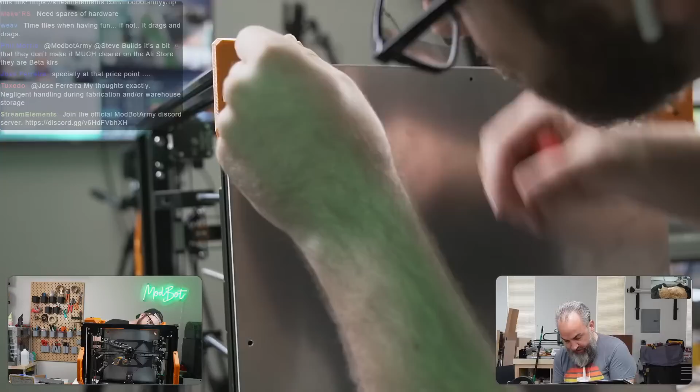Some little things, sure, but there's quite a few things adding up. That is definitely, if anything, another thing that needs to come up: the exact number of fasteners. It's minimal extra cost to add extra fasteners. Most kits I've built come with plenty for mods and all sorts of stuff, so yeah, they definitely shouldn't be pinching on the fasteners. It says beta kit on the Mellow site. Interesting.

And I get that still, but some of the things sound like they've been mentioned and maybe didn't make it into this round. I think part of it too is, at least with some of your stuff, the printed parts, right? Because we went through the Easy VZ program, I think we assumed the printed parts would be the correct ones for what we were building, which hasn't exactly been the case. So it's sort of cumulative, I think, of both sides of it.

So I'm just lining up all the fasteners for the bottom panel, for the feet. Extra fasteners is a must. Yeah, I agree.

All right, I got 2 of my feet on. The feet stick out a bit, so just be careful when you turn it. I'm gonna try to be kind of gentle with it so I don't let them take too much. The feet are bigger than the base. Oh shit. I dropped my feet. Okay, and it's starting to get heavy, man. So close, it's starting to get heavy.

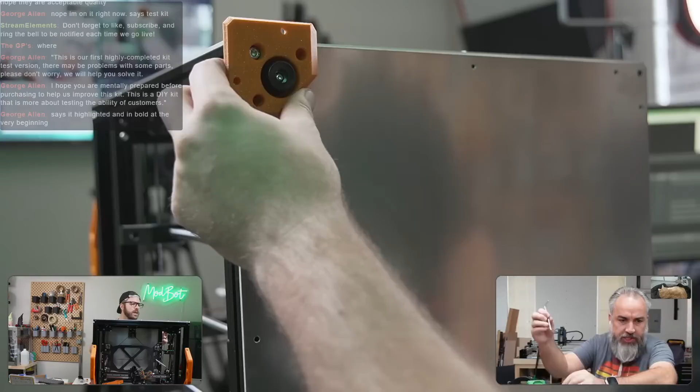This is our first highly completed kit test version. There may be problems with some parts. Please don't worry, we'll help you solve it. I hope you were mentally prepared before purchasing to help us improve the kit. This is a DIY kit. This is more about testing the ability of customers. It's highlighted and in bold at the very beginning. Well, that's good, at least it's there.

But still, let's close the gap, because it doesn't need to be. The components in here are really high quality. Like we were talking about the CNC stuff, they're making really high quality stuff for it, and at the price point too, the CNC stuff is really so nice, gorgeous. Yeah, it's really, really nice.

Why is that not going? There we go. Hey, you're in some. Hi. S? The S? Yeah. Okay, 1 foot is on. Woohoo. I'm on the final countdown.

Not defending the printer, but I've learned a lot from it. Not for printer, but I have fun. Yeah, somebody needs to get Steve gummies to Prusa. I'm getting hangry. Yeah, I feel that. Let me make sure these last couple are lined up perfectly.

Okay, I'm gonna lift this up. All right, let's see. Nice, can't really see, the camera cuts off right where I am. Oh there, you can see the feet on that side. It looks good.

It definitely ties the printer together, having that orange down there. I like that they're low profile. Actually it's sort of cool, it almost reminds me of a street car with stance, you know, like the tires all low. It's neat, it's just different than any of the feet I've installed on any other printer.

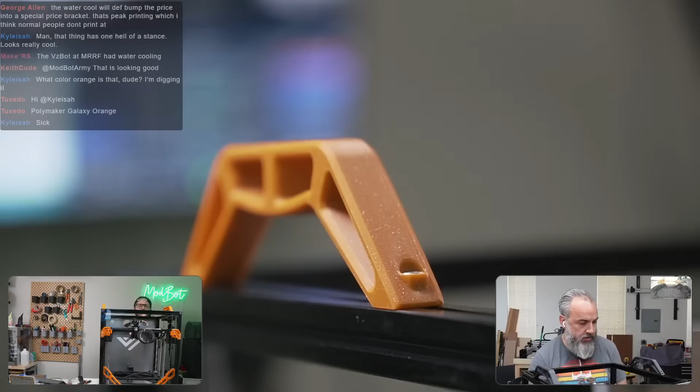I can show you actually, let me go to the side, I think I can hit the light, if the light hits it just right. Let's see, this looks good. Yeah, you can see the sparkles on it, Kyle. It's got little glittery sparkles in it, so it kind of hides layer lines a little bit, but also just gives it a nice little pop.

Yeah, yours looks good, Steve. Yeah, the green looks nice, pretty pleased. You reprinted those feet in green, right? You said you got them in black when... no, oh okay, that's how they printed them. Yeah, it does look good, it's so nice having that little bit of color on the bottom.

Yeah, I love that orange, doing the orange frame V0 in it. Didn't you use this orange on another build too, Zombie? I feel like on your Trident, I thought you had some of it on there.

Well, the only other thing we had talked about getting to is that rear exhaust fan. Is it worth trying to put that together? I don't feel like putting it together. No, I don't blame you.

What's up, Jack? He's smiling at me, he's laughing at me. Little cutie pie, he's shirtless, Jackson though. Yeah, he's in diapers. All right, I'm gonna show baby Jackson diapers, but I'll bring him out. Let's end the stream on a laugh. All right, come on, Bubby. He just got home, is it nap time for him after this? Yeah, all right, come on kiddo. Oh look at the VZBot, Bubs. Dude, look how handsome this little man is, dude. Look at dude, still love the thighs. Oh yeah, dude. Yeah, they love your thighs, bubs. Baby rolls, he's our little, yeah, he's our little Hawaiian roll boy. Bubs.